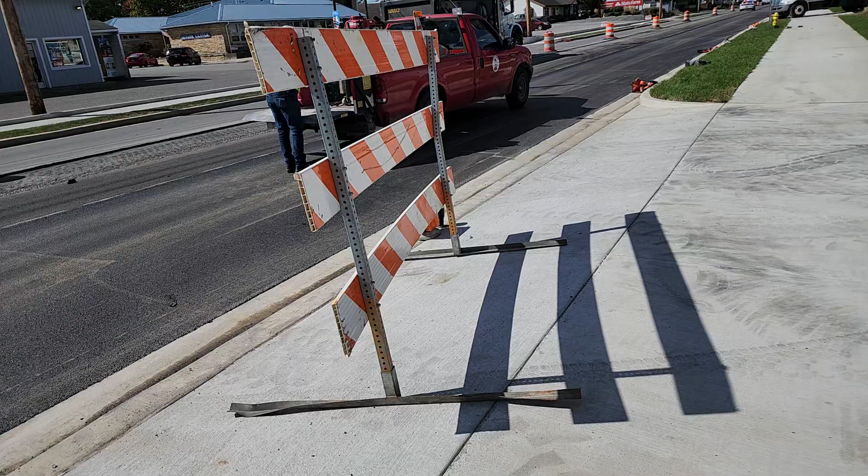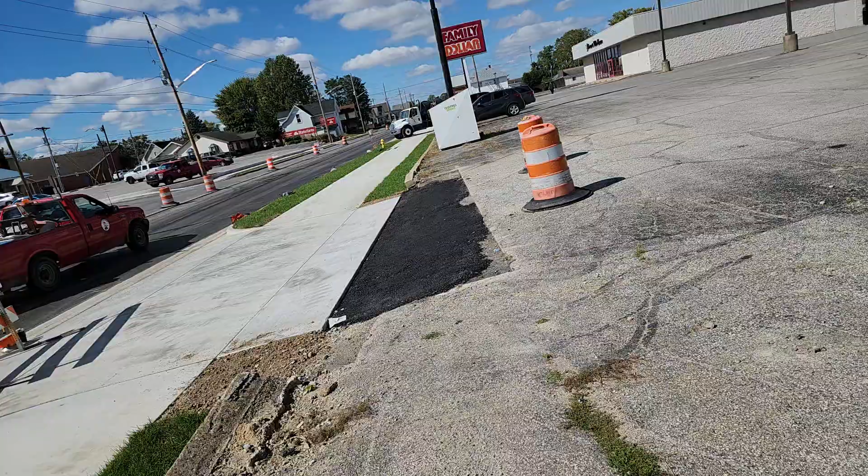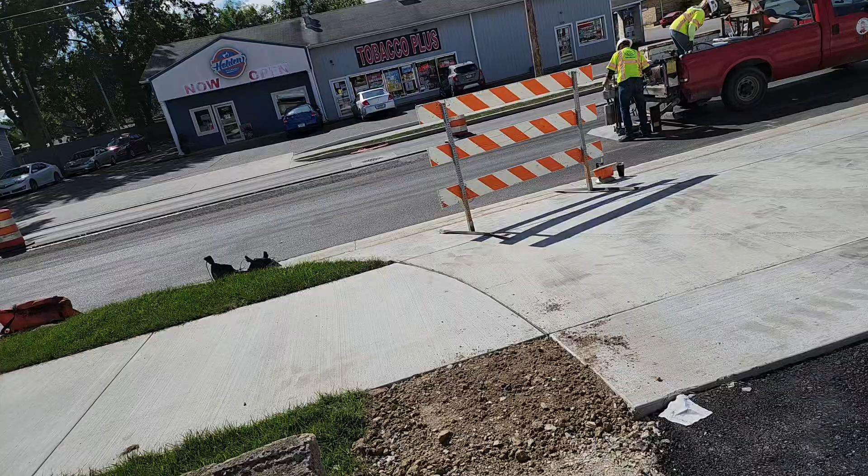My name is Leon Jones, and I'm gonna call this video part 2. Now, in the previous video, what you saw was how plate samples were taken for bituminous testing. Now, during this video, it's part 2 of bituminous testing, and what you're going to see is how core samples are taken. Because when you take samples, we want to make sure that we get them for testing, and we want to make sure everything is all right.

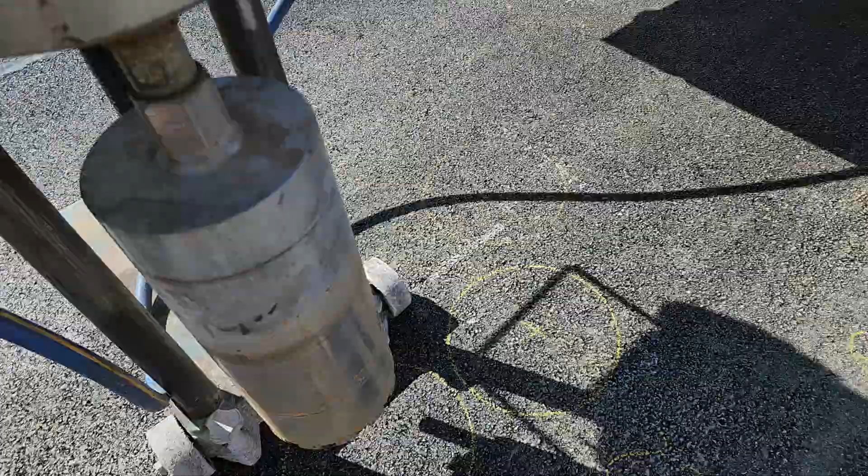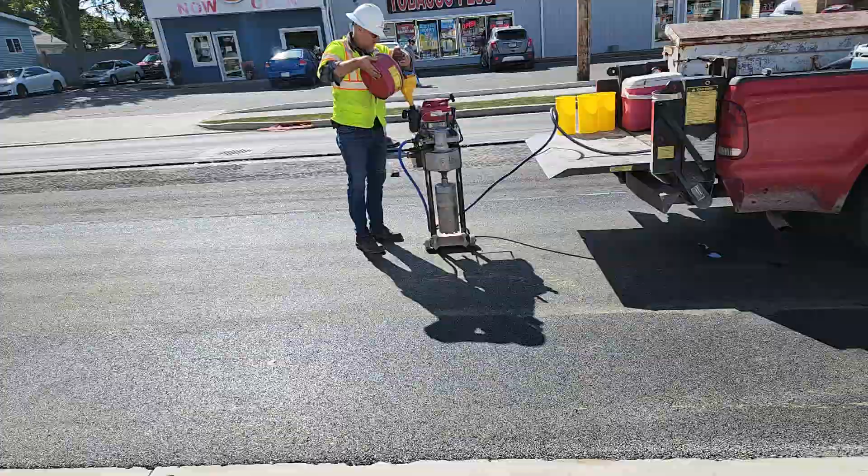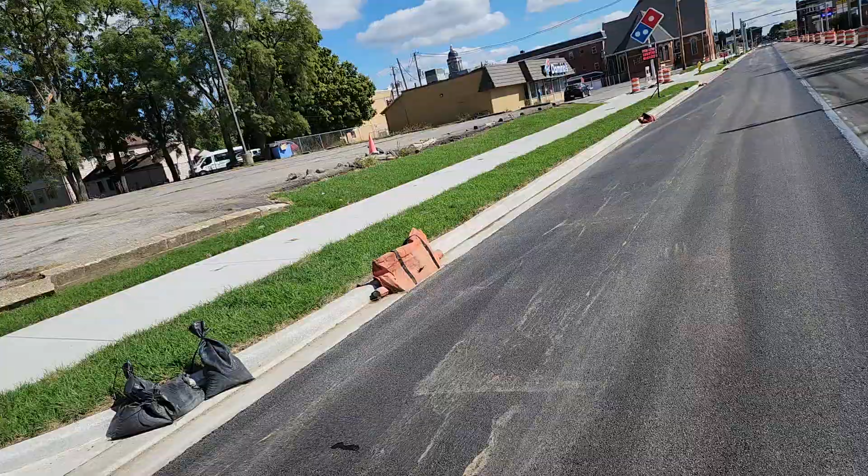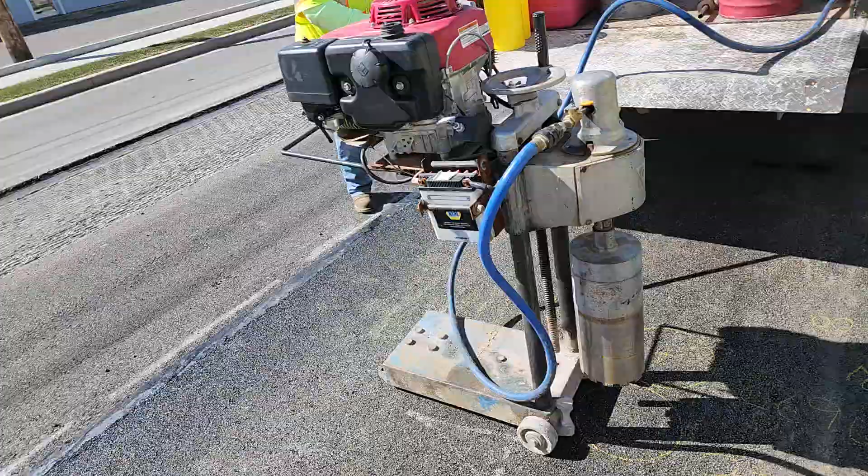Now again, we have to make sure that everything works. And there's information that you have to write. Put 313 or put 11A and B on the same piece of tape. We can lay these on my floorboard. I won't need a bucket. Sure. Yep. We'll lay them on my floorboard, then I'll drop them at the lab tonight. We'll be okay.

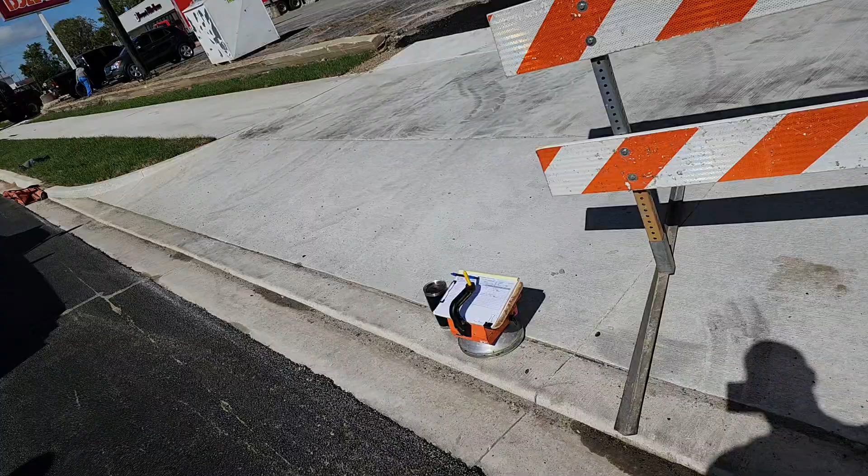And again, this is all the paperwork that you see. Here it is. All the numbers that are taken. And now here's the core machine. Here we go. Start core. Want to pull it out of it?

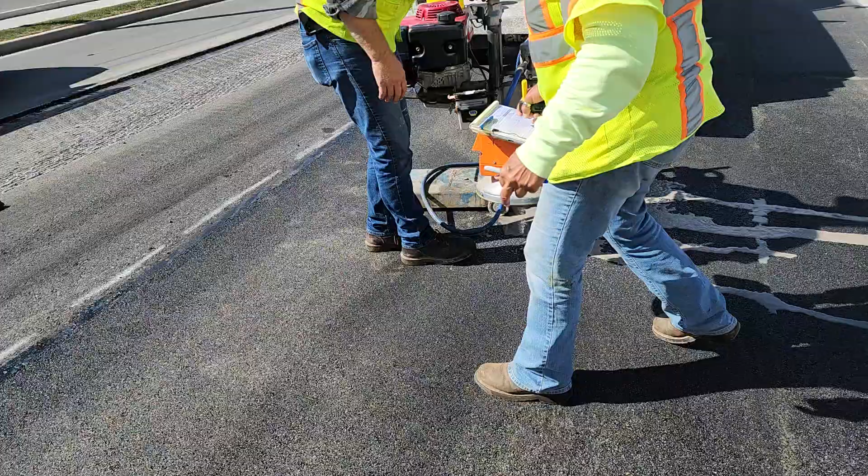Because of the tack that they put between the binder course and the surface course, sometimes the cores are hard to do. We'll see what's going to happen today. This is how you take cores.

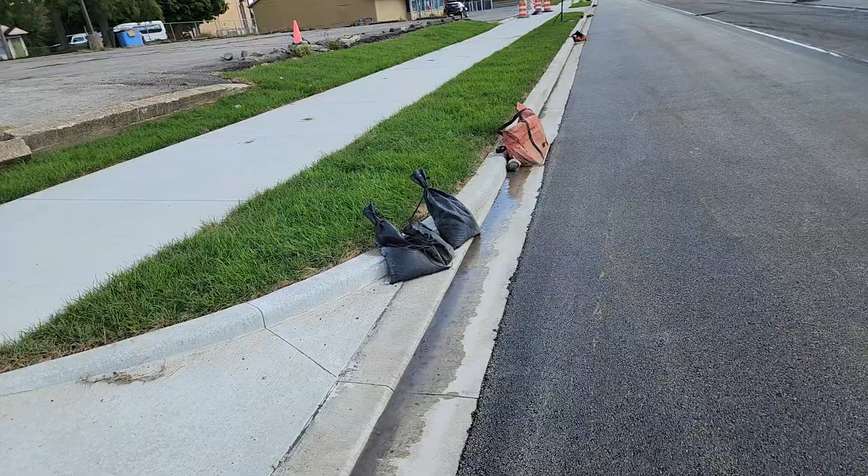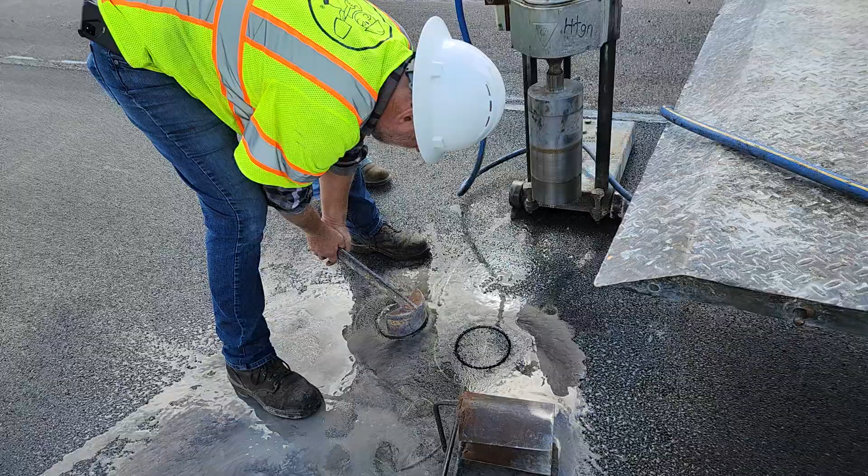What they're getting ready to do is pull the cores. Show what they look like. Oh, remember when they pulled them on Saturday? Tough job pulling these cores. But this one looks like it's coming out. This is ours. Here's the core sample as it comes out.

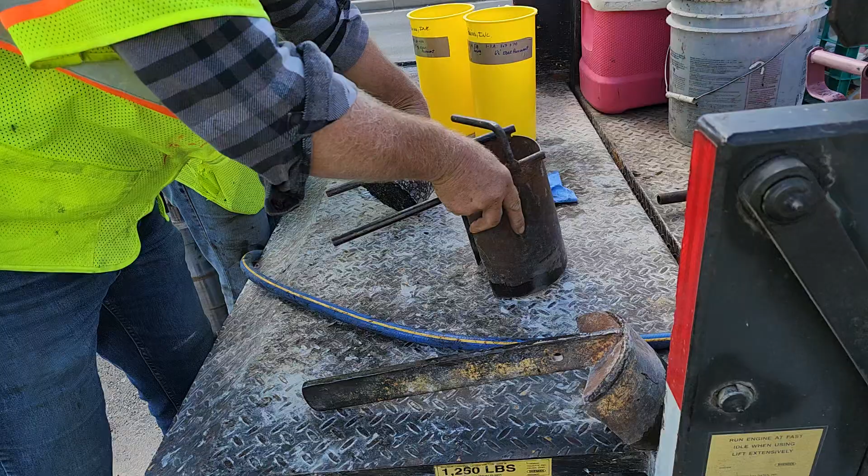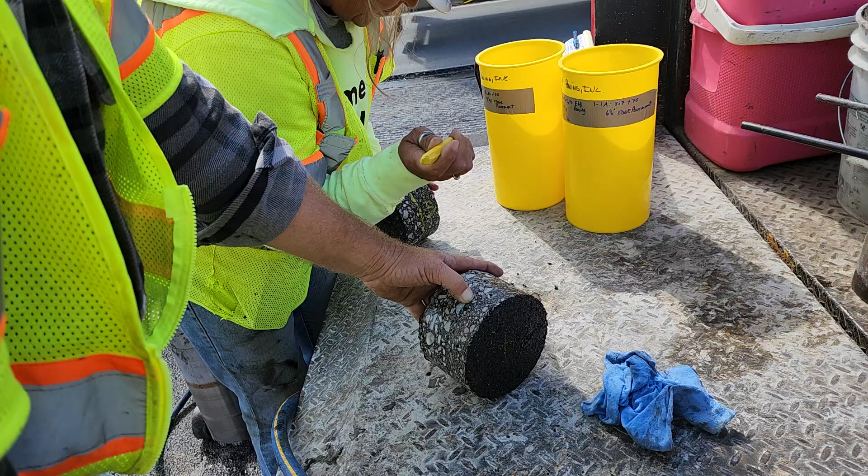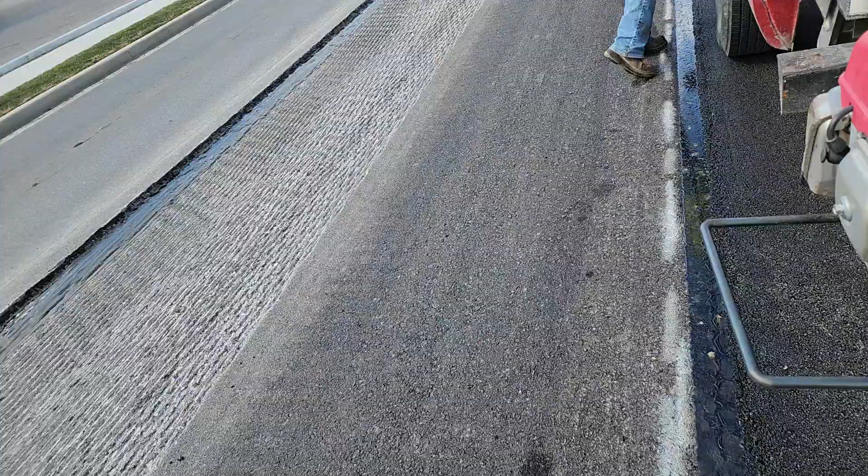Yeah. Beauty. This one's ours. Yes, that one's ours. This one's theirs. That'll be 1B. Put things on the cylinder mold correctly. Make sure it's labeled. Core sample.

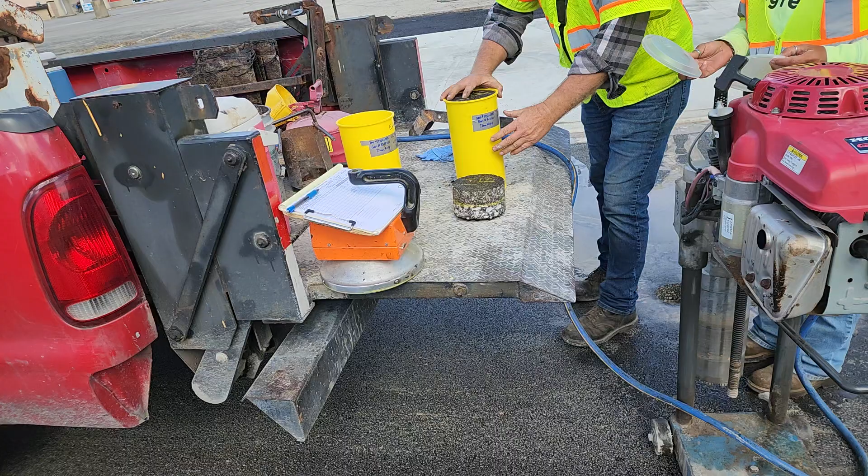Probably have to wait for that to cool now. No. It's got a little bit of a lip around the bottom, so it'll be all right. I'll get her down. There we go. That's what it looks like after they pull the cores. Of course, you gotta fill that back in.

I guess the other section of those other ones will be ready to be taken too, huh? What's that? Well, if we're not past 600 ton, they won't. No, not the second. I'm talking about the other station we just marked at 307. Yes, we'll go straight up and get in. All right, I'll meet you all up there.

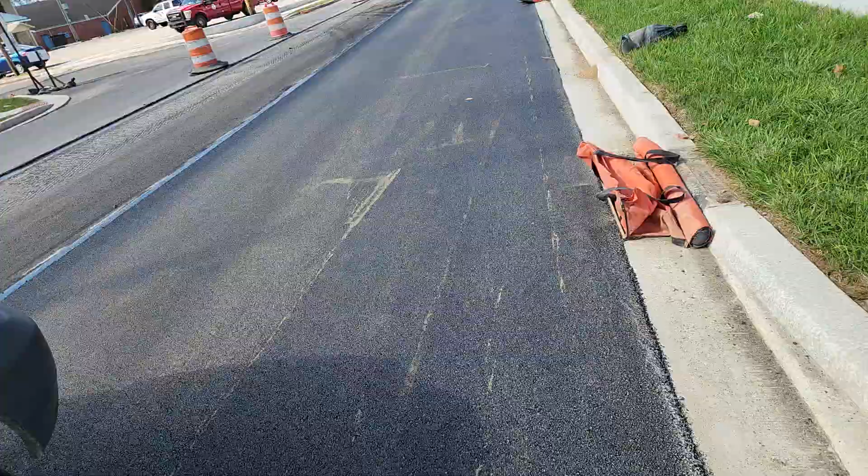Okay. All right. Well, that's seeing the operation. That's how they pull cores. Now that was at station 311. Now, how do they know where to take the cores? They got it from me. I'm the one that had the stations marked. So I'm going to show you what I marked out before the cores were taken. Because it's very important that you have all the information right.

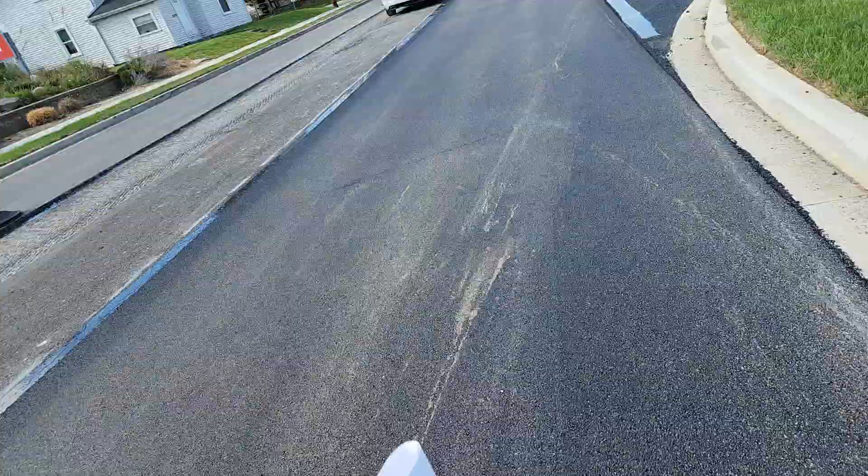And you get your exercise out here when you are paving. And right now the pavement has cooled down. I'm going up to the next street here. Okay, this is Taylor Street. Again, if you want to know what that joint seal looks like, that's the joint seal that I told you about. Goes all the way up. And it goes all the way up here. You can see. Now, for the cores.

All right. Here's the station that I picked. Here's a sample, 118, 30770. And here are the two areas that I marked. We're going to be taking the cores. So get ready to set it up. And you're going to see the process all over again. Yep. Move, move. And as an inspector, I sit here and just supervise it.

And that way you're getting a full round of testing and sublot. This is the first sublot. Again, review, here's a core machine. Yeah, no. We're good. So you get a review. Here we go. It's the core machine.

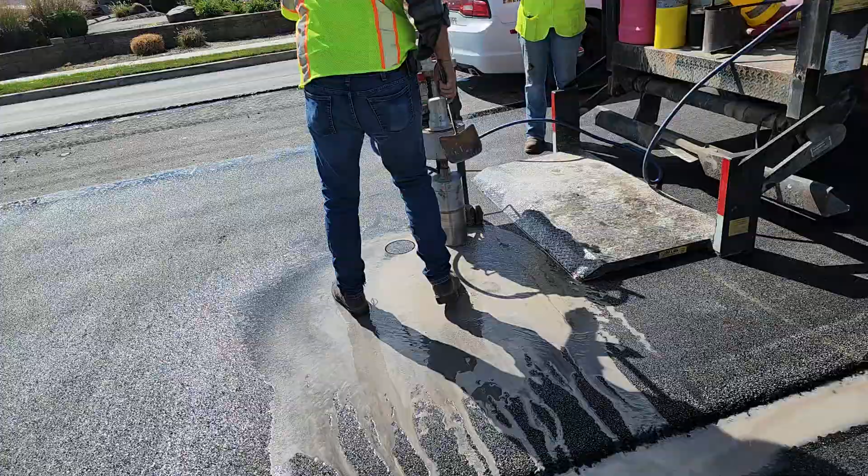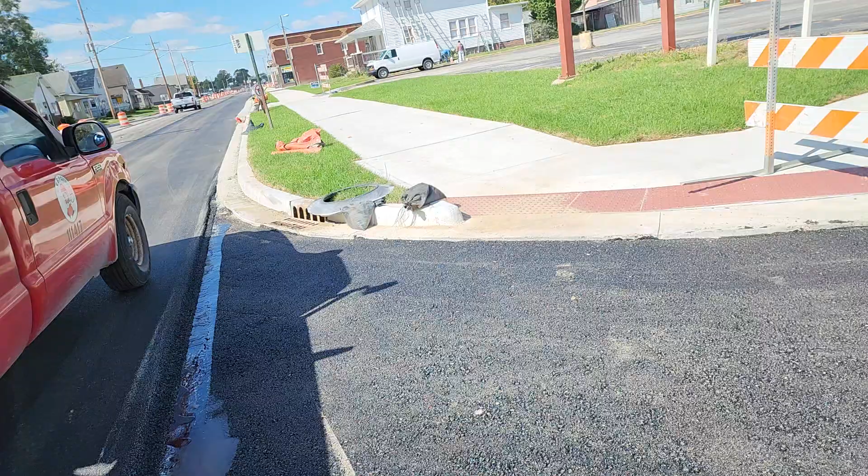There's also a way to handle the core and mark the cores. Technicians put a line on the cores because the cores have to be cut. And they have to be cut based on the depth of the pavement that they place. So although the core may have been cut 6 inches, they have to cut at least 1.5 inches off. So that's why it's being marked with that yellow chalk.

Right. You had it off. Some turn it off, some don't. I tried it, and I always did too. That's why when it was running, I'm like, wait a minute, I bet she got it off. And that's the only reason I was asking. Yeah.

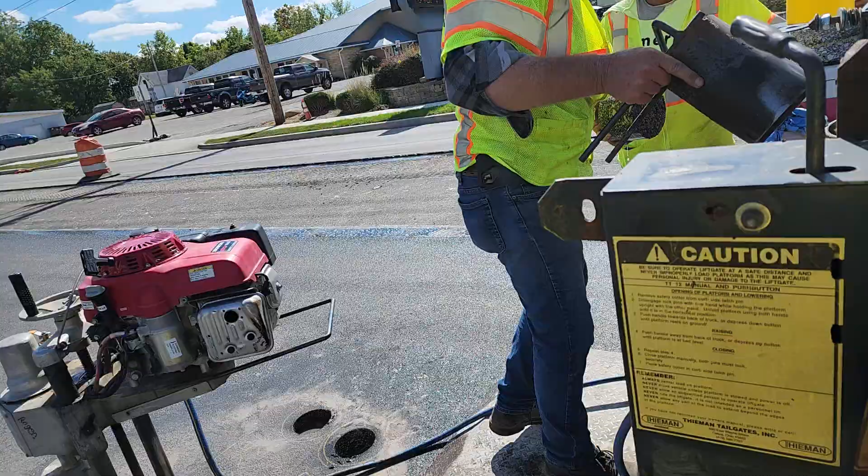All right, then we get it out. All right, this is his core. Those came out a little easier. Yeah, just a little deeper. Yeah, a little deeper, okay. Show you what the holes look like. Fill the holes back up. There's the cylinder mold. And he's taking a piece of keel, which is chalk, he's marking it off.

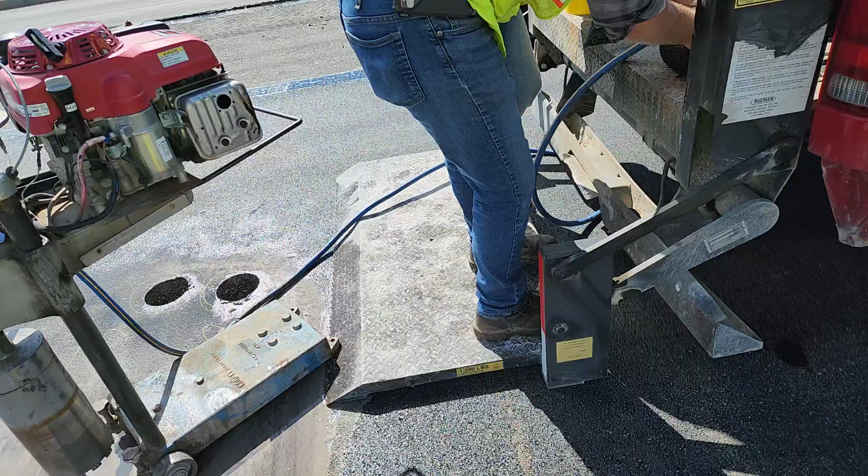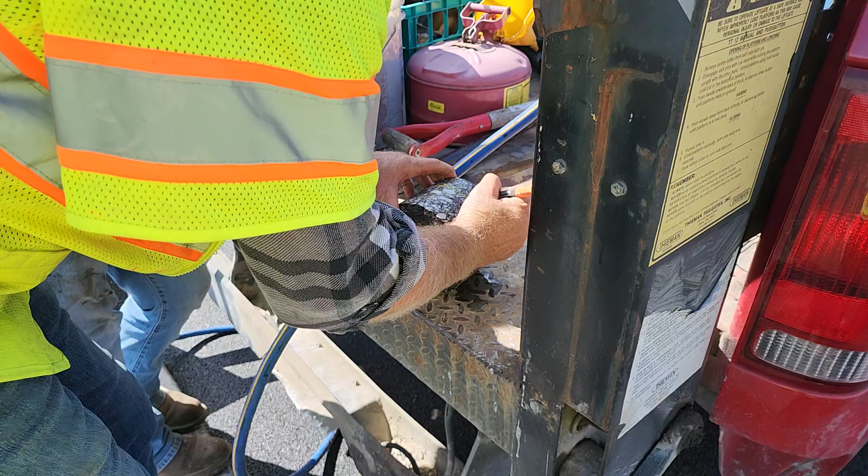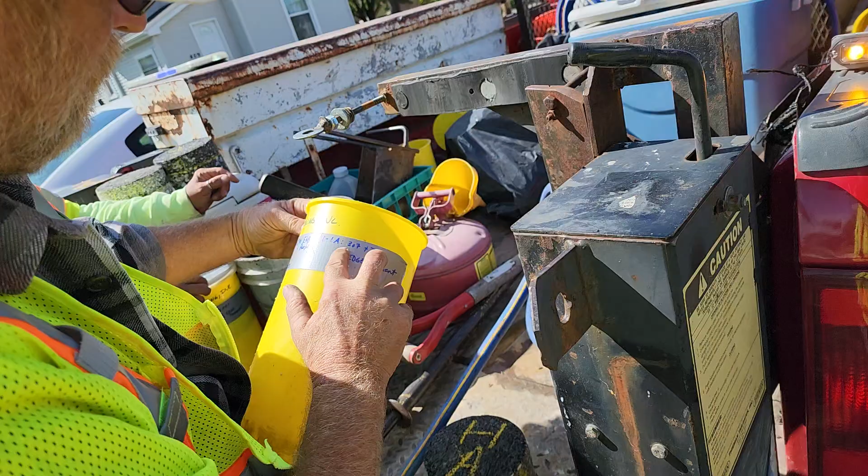Yep, this is an A. 1-1A. Put it right in that good old cylinder mold. 1A. Fits like a glove. Right in the cylinder mold. That's it. That is a wrap. We'll go get some mix and we'll get them filled back up.

All right. Hey, I appreciate it, and I'll be ready for the next one. Okay, thank you very much. You're welcome.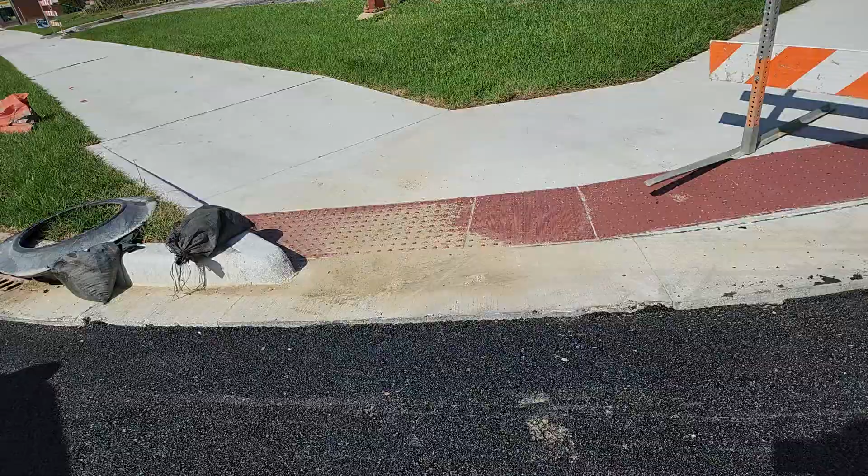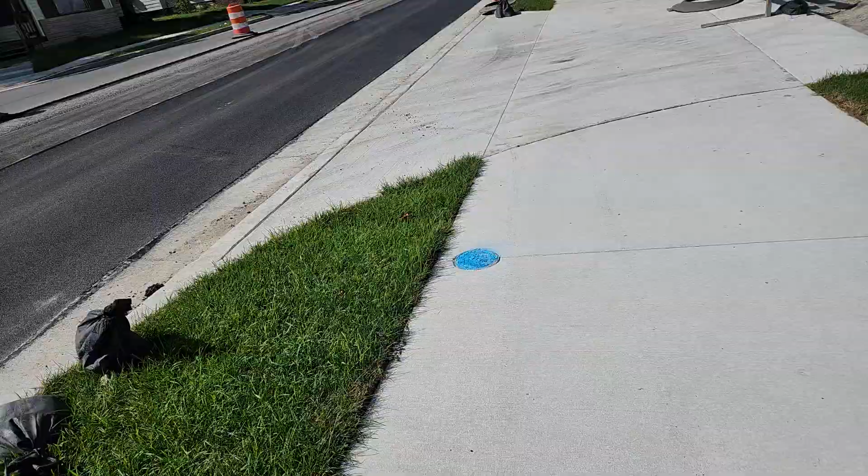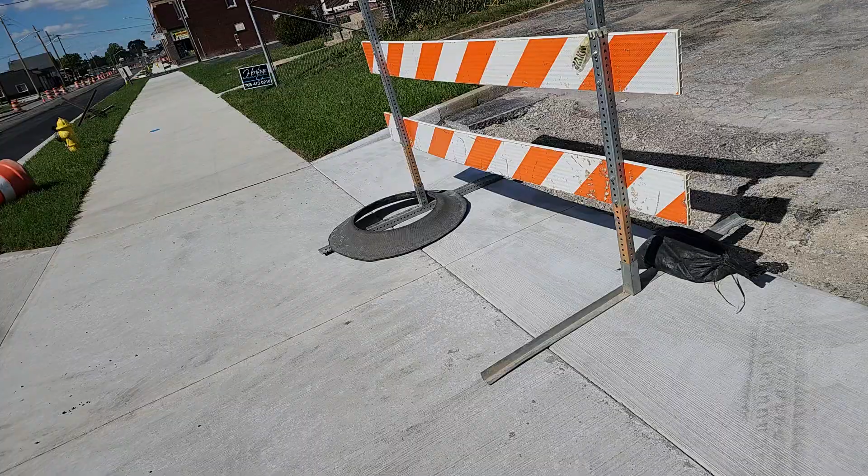Well, that's what I've just presented to you. So just to review, you've just seen how testing for bituminous is taken. I showed you the plate samples. I showed you how they weigh the plate samples. I showed you how the areas for the cores were marked by station and of course by product number. And I showed you how the core machine looked. I also showed you what the cores look like, and what the box samples look like.

So basically, when it comes to surface, we have 600-ton sublots, so it's a 3,000-ton lot. When it comes to lots, we have to have 5 samples per lot. Now when we get to the binder or the intermediate course, the sublots are 1,000 ton for a 5,000 ton lot, but the process is the same.

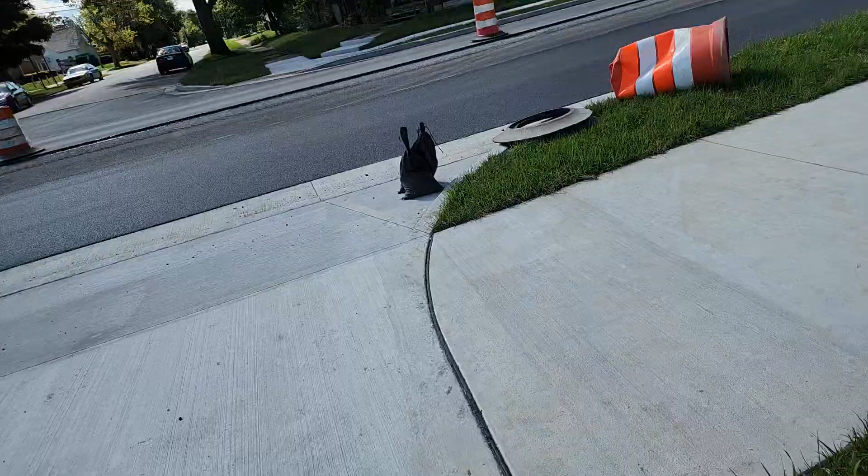So what you all saw was testing. Bituminous testing, just like concrete. You got a chance to see the core machine. And that bit, when it doesn't work, you can't cut the cores. So when it comes to testing, there's always a procedure. Now most people don't understand structure, but you have to have structure when you're working in this business. And as an inspector, it's my job to make sure that the due diligence is done correctly.

Now I'm going to take you out on a new mat. This is the new mat that they laid. Now, something to tell you. When they do these approaches, you see that joint seal? They're going to have to put more of that joint seal down as well, because they're going to have to bind the 2 joints together. When they put in this next strip, they're going to have to do the same thing. Again, this is your joint seal.

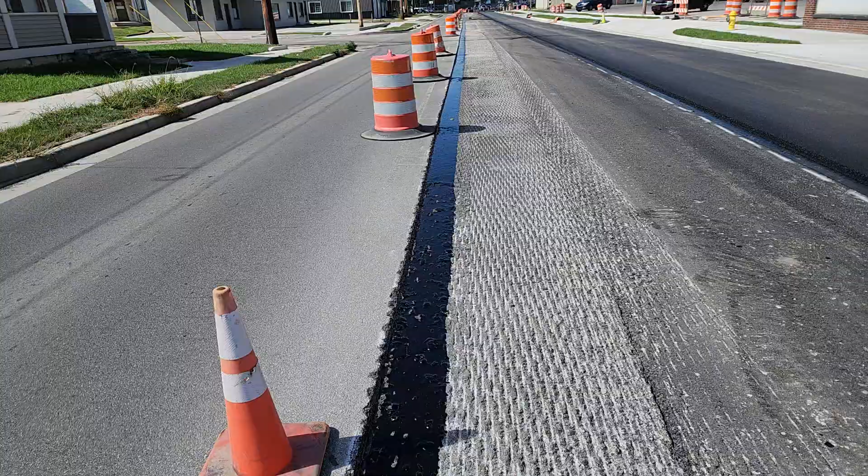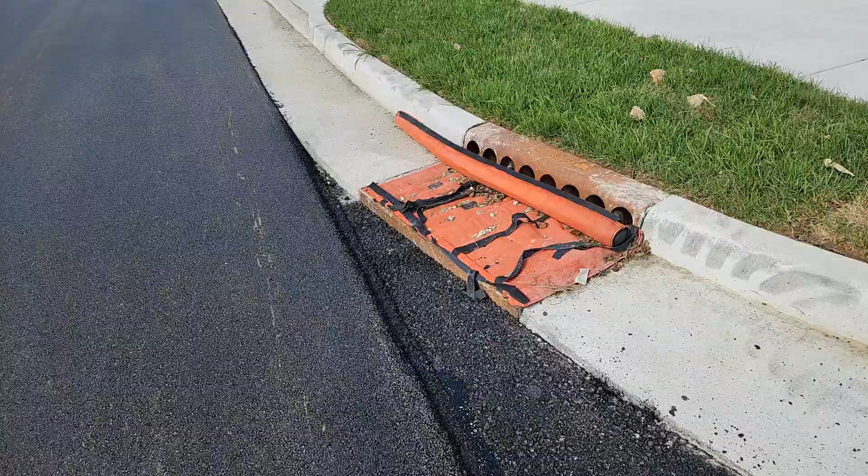Now, yesterday, this is what your milled surface looks like. This is what your wedge looks like. And this is what your final surface looks like. This right here is what your asphalt approach looks like as it approaches the street. That's Duval Street. And of course, this is what your concrete approach looks like.

Again, this is the new mat that they placed today. I just wanted to make sure you all saw all the testing that was involved. Now, something that you should know.

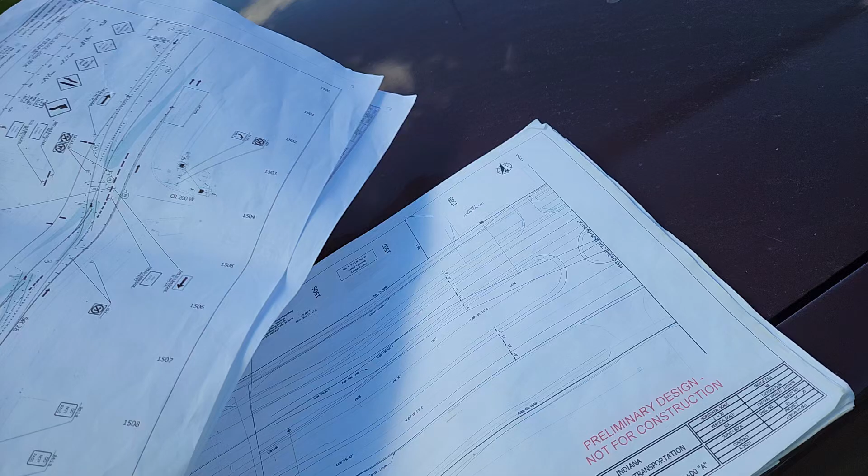You also have to be able to read plans. Now, I'm going to show you my plans. These are my plans that I have. And I'm going to actually show you how I got the stations. If you're not familiar, a station is a location.

And also something you need to know when we do concrete or asphalt is the tickets. Now what I do with my tickets, I always mark them. Where do we take it? The approach, the station, and exactly what route number and avenue. And with these tickets, this is your total tonnage. I do that because when I go and pay the contractor, they know exactly where everything was taken.

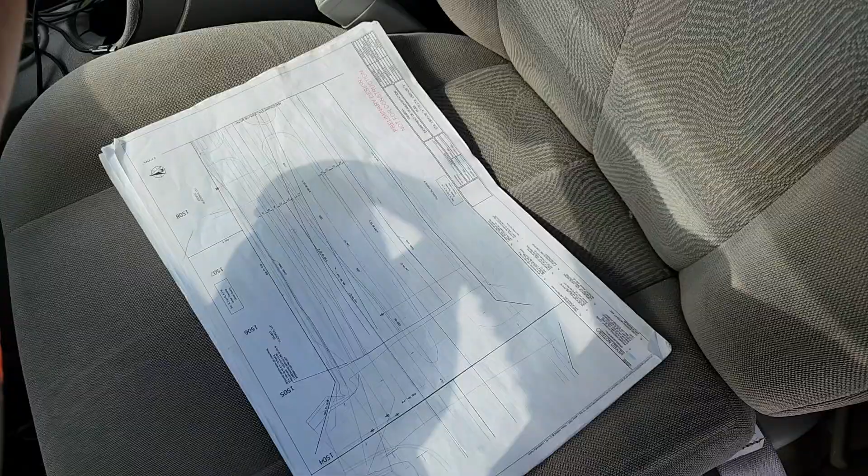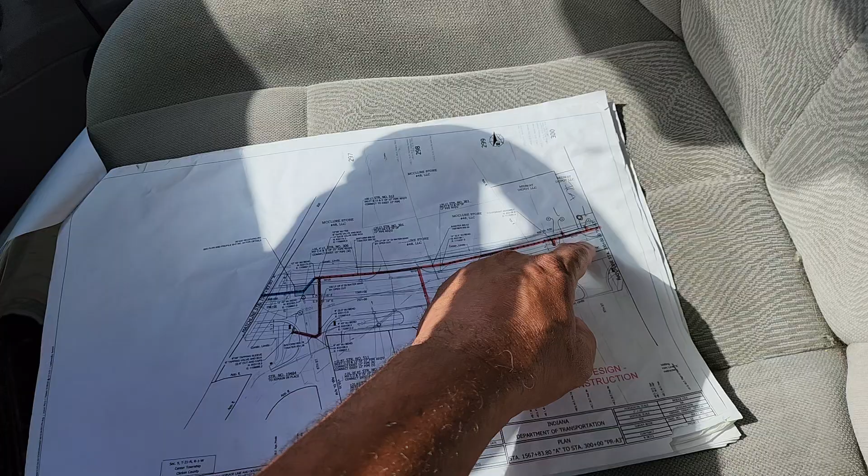Now, to show you something else, the plans, and these are very important as an inspector. Now, when I took the first test, I got it at, you heard me yell out 300+00. This is 300+00 on the plans. This is over there where the IGA is. This is where I took the test. I took the test here because it was a feasible place, because it was an even station.

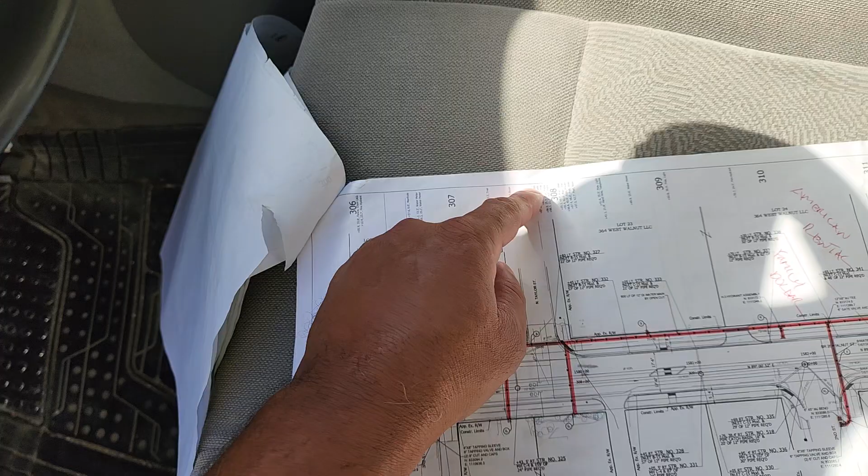Now, when I set up to do the cores, took it right down here. 307, 307+70, North Taylor Street. Well, here's 307 and here's 308. And basically what I did, I always cut the stations into quarters, 25, 50, 75. So I took it right around 307.75, but I basically estimated around 307.70. That's where we took the first cores at. That's where the first core should have been taken, core A.

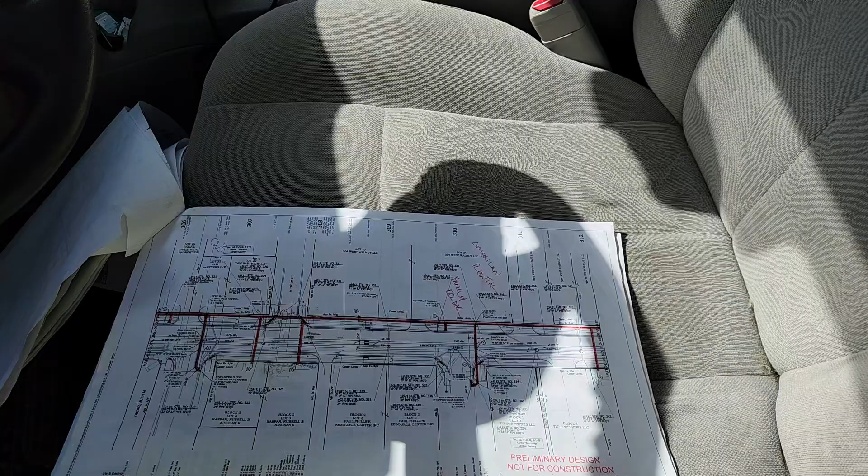Now, over here right around Family Dollar and American Rental, I took the second set of cores at 311, right in this area right here. Now, I like to take mine in the area of the approaches, because a lot of traffic comes out of the approaches. You have more load coming out of the approaches.

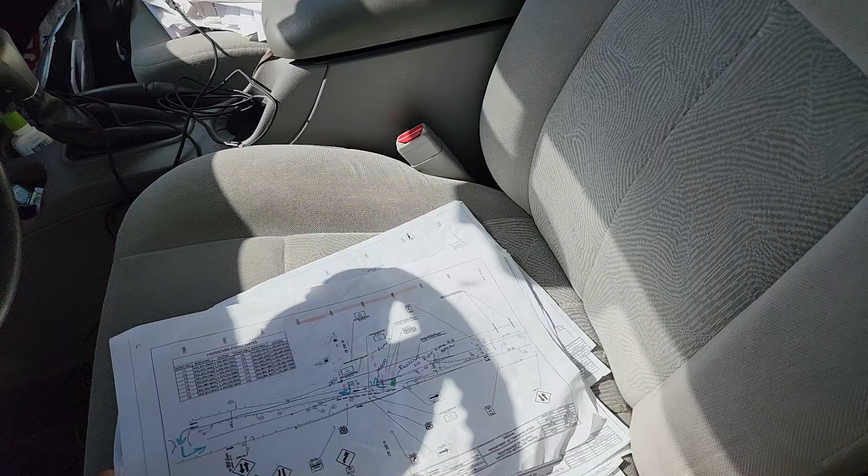But when you read these plans, you got to read the plans to find all of the information. Most people don't know how to read the plans. So as an inspector, my job is to show you how to read the plans.

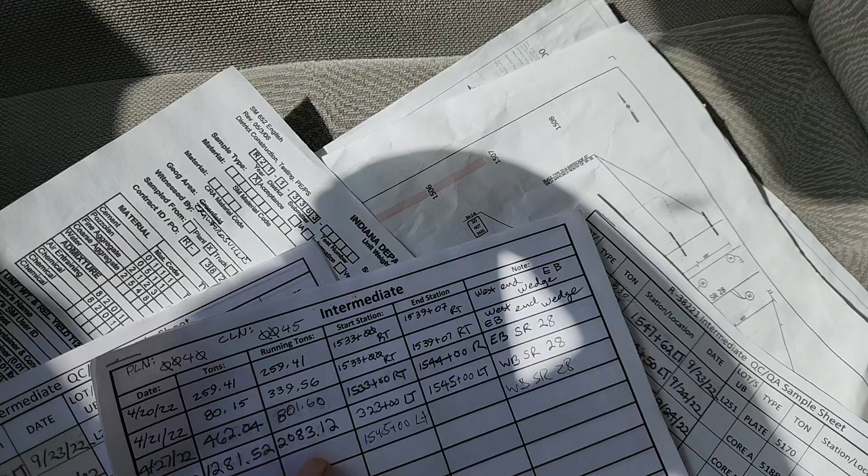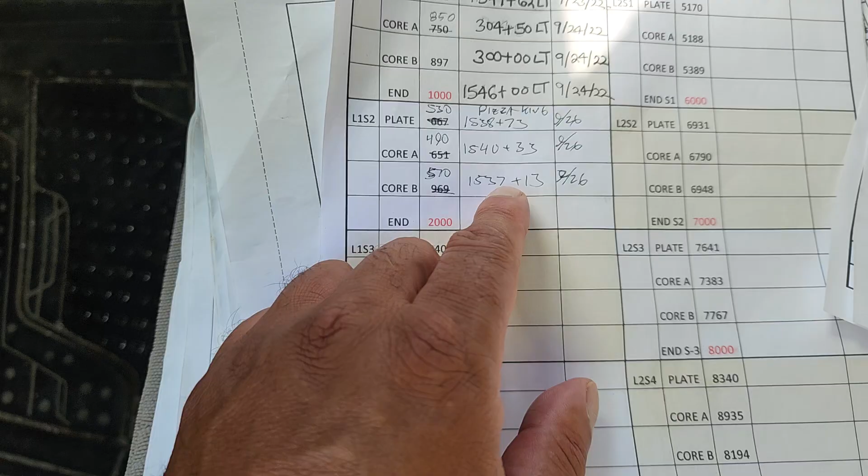Now, something else that I do, that I track with asphalt. Right here, you see that they laid intermediate. Well, I usually take this and put down the total tonnage. Like, this is the tonnage that I did the other day, 2083.12. And this is a station where we stop. Now, when I did my test, this is where I stopped. Everything here is tracked. Everything.

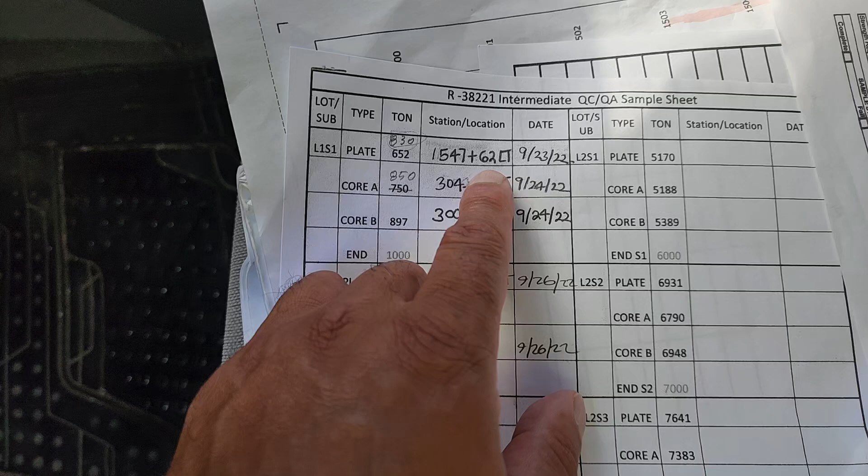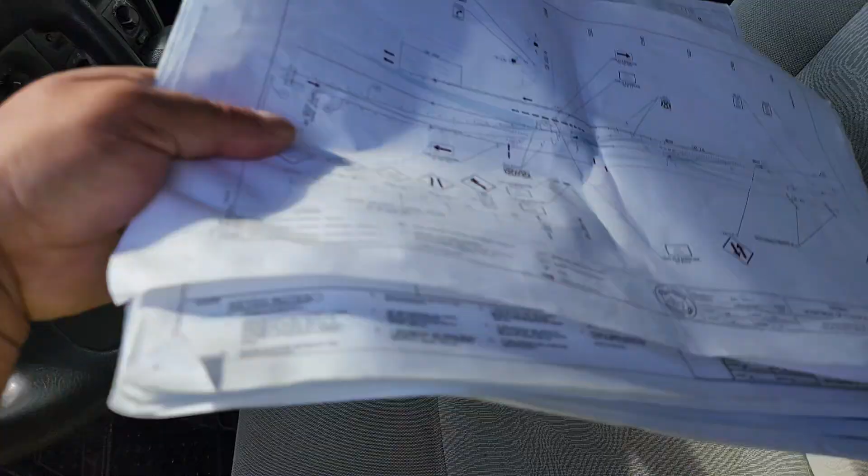This is where I took all my information for the intermediate as well. And this is where the other inspector came. And see, the paperwork has to be filled out right, because if I'm not on this task, the person that's going to be on this task, instead of asking me, they can pick up basically where I left off. In other words, it acts as if I wasn't there.

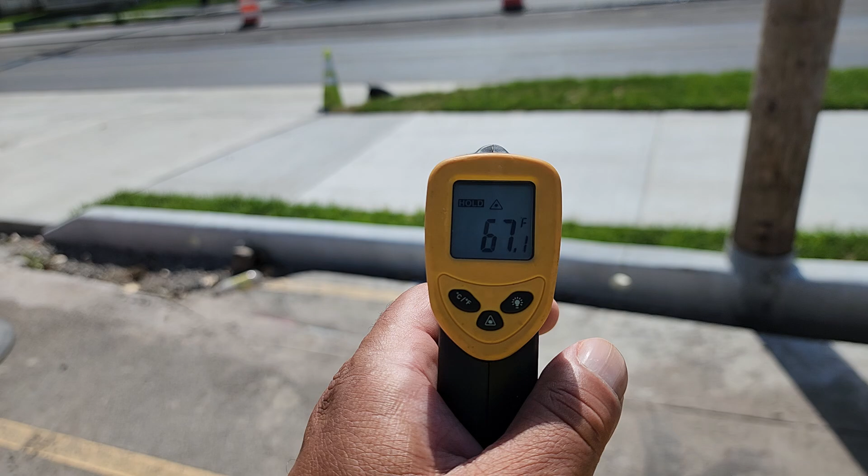And to be an inspector, you know, there's certain things you have to do. There's certain things that I use, like when I want to take temperature. I have a temperature gun. Now, right now, you see the temperature? It's taking an ambient temperature. It's 67 degrees, if you can see it. That's what I do. I shoot it at 68 degrees.

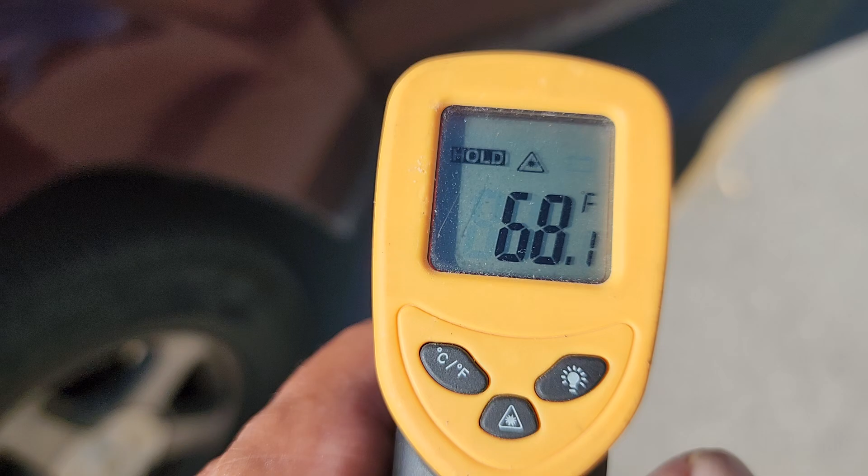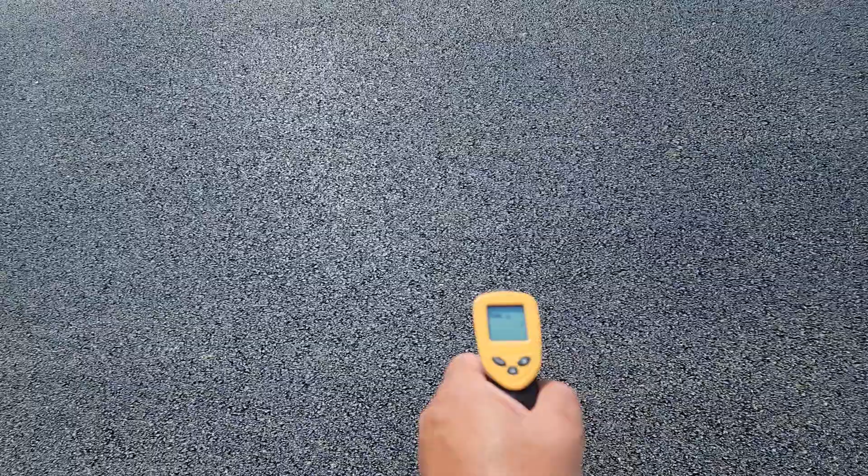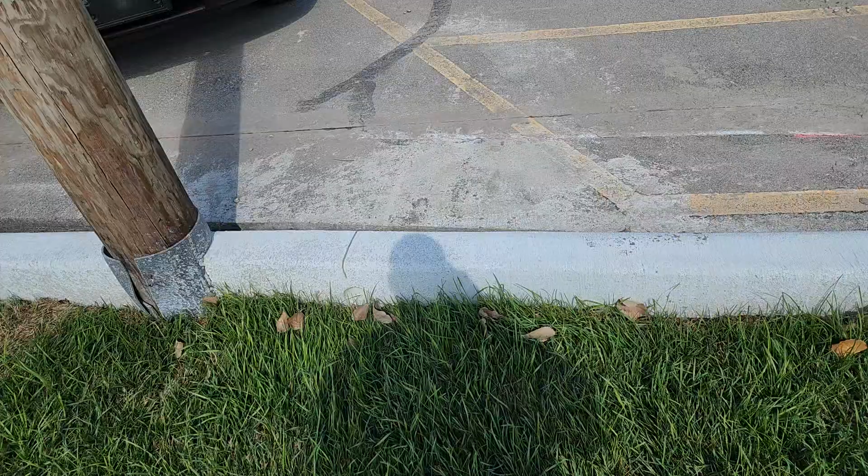That's the temperature. Now, I'll go show you how I take the temperature of the asphalt, because it has an infrared light in this temperature gun. So I shoot it down, and it gives me the temperature, 91. That's the asphalt temperature. Generally, the asphalt is a little hotter than the ambient temperature. But basically, that's what you do when you test asphalt. Just want to make sure that the design mix is proper and the product is placed according to specifications.

Now, that concludes this topic on Bituminous testing part 2.